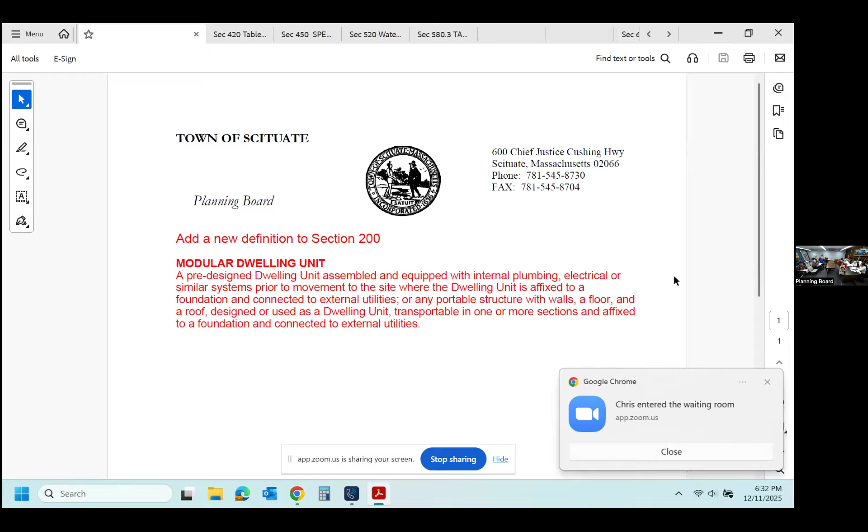It's up on the board, so I think everybody can read it. It's the state definition, and we just thought it would make sense to add it since the AG struck out our stuff about trailers in our bylaw. Any questions from the board, any comments?

Is anybody in the audience? Yes, Mr. Gilpin. Steve York, just for the record, so this is any size building that can be habitable, as long as it would be a single family dwelling. So when they get into zoning for tiny homes and stuff like that, this is going to cover that as well, there's no size limitation in this law.

It's not a tiny home. A tiny home has a separate definition. And the town has to designate it, a modular dwelling unit is a modular dwelling unit. So if a tiny home would satisfy that, it would satisfy it. But tiny homes have to be accepted by the town, and tiny homes are not accepted by the town. They're not designated in the town of Scituate. So there's nothing in this definition that exempts a tiny home, so that's my point, it should say something.

No, because this is right from the state. And the state says that this does not include tiny homes. No, the state does not say that. Okay, anybody else?

I'll vote. Madam Chairman, oh yes, hi Bob. I just want to input on that a little bit. The building code has restrictions on room size, ceiling height, inspections, and various other aspects of the requirements that would be difficult, if not impossible, for a tiny home. At least the typical ones that we're seeing and thinking of in the news, online, whatever, really couldn't be met by those. Thank you.

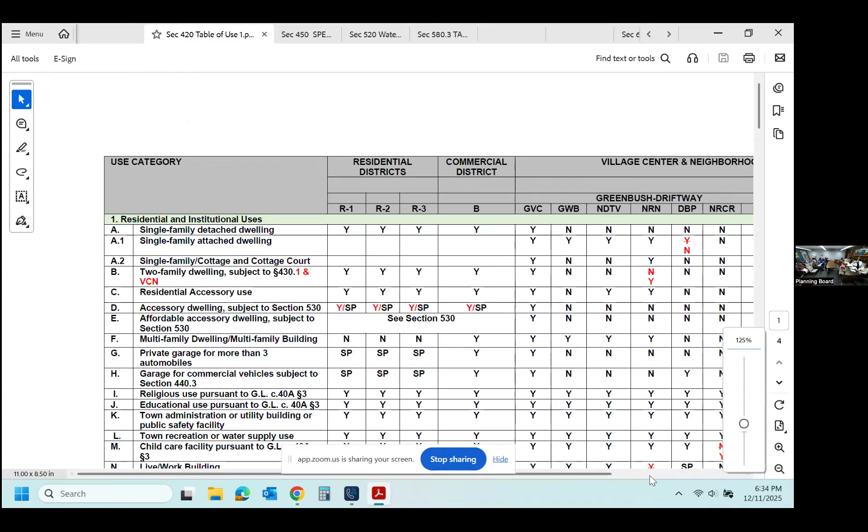So the table of uses: a single family under A1, single family attached dwelling, that's not allowed in the DBP. B, a two-family dwelling subject to 430.1 in the VCN, NRN—it's not allowed. It is allowed. It is allowed.

Accessory dwellings subject to 530 are allowed by right. And we kept the special permit because if you have an ADU over 900 square feet, it's going to require a special permit. But the majority of accessory dwelling units are going to be by right, unless you have a larger home.

Childcare facility, line M, childcare has to be allowed in every district. Not that they would be in every district, but they have to be allowed.

Live work building, number N, not allowed, we're changing it from yes to no in the NRN. Mixed use building—technically you can have a mixed use building in the harbor under the village business overlay district, and that's a special permit. A mixed use building is not allowed in the NRN.

So all of those things, there's all of those different zones in town, so we have 14 of those, it's not a one-size-fits-all situation. Lots of designations for all little areas. The red is the changes. Any comments? That's it? Okay.

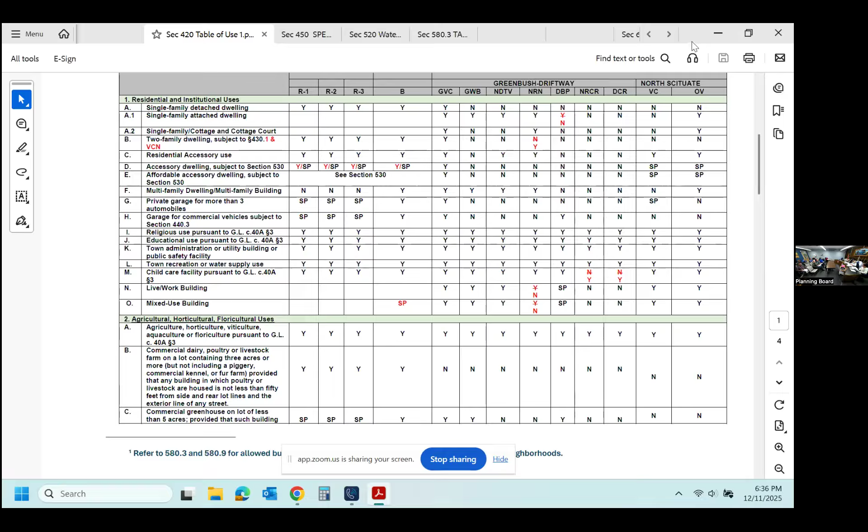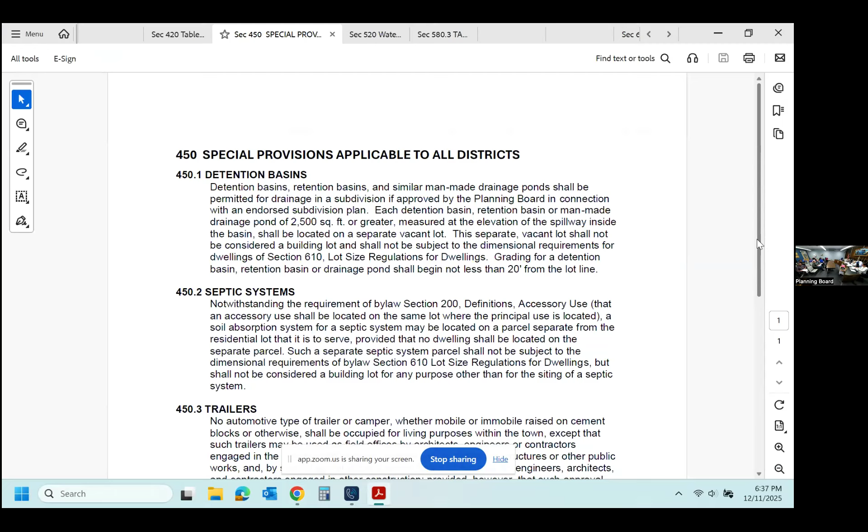The next one is a change under section 450, special provision applicable to all districts. We're adding a 450.5 construction site preparation standard. We're basically reiterating what some departments are already doing, most of us are already doing: no site work until you have all your permits. So we're just putting it in the zoning bylaw.

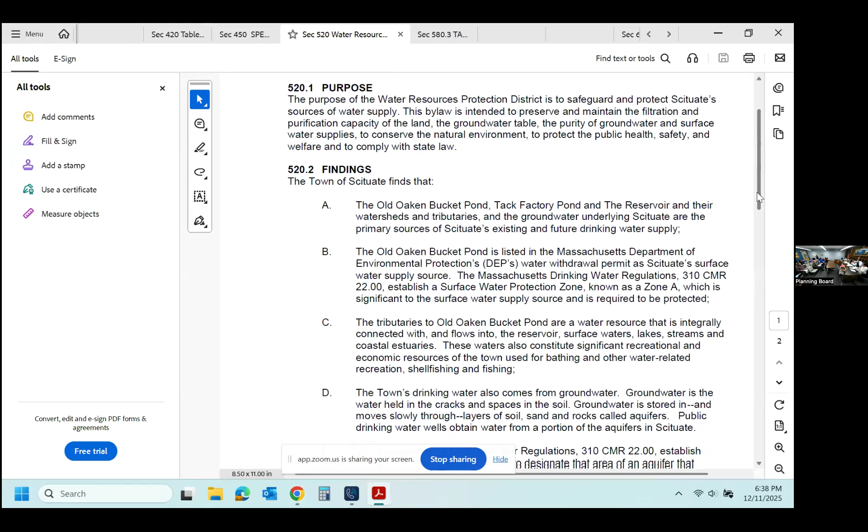Next, Karen? Next one is the Water Resource Protection District. This is a proposed change to change the non-disturbance buffer zone from 150 feet to 400 feet from the high water mark of the surface water sources outlined in 520.2A, and 200 feet horizontally from the edge of all tributaries in the watershed for the sources identified above.

The state regulations for water quality standards list Class A water as anything having a 400-foot boundary, and 200 feet from the tributaries.

So this article is going to be sponsored by the planning board in conjunction with the Water Resource Commission. Does the Water Resource Commission want to say anything on the article? Yeah, Bruce Arbides, 23 Dan Pasture Lane, also chair of the Water Resources Commission.

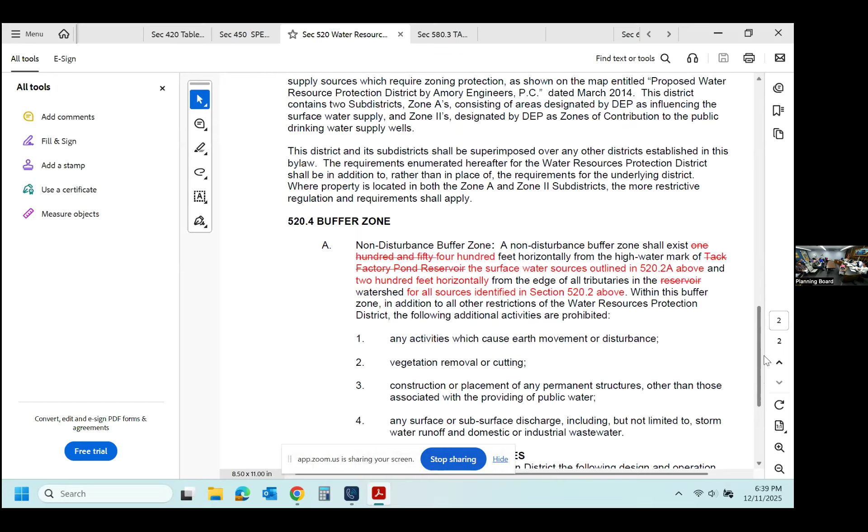I also want to mention that there's a wording change that needs to take place in section 520.2, in the buffer zone. Now the wording change is in 520.4, buffer zone.

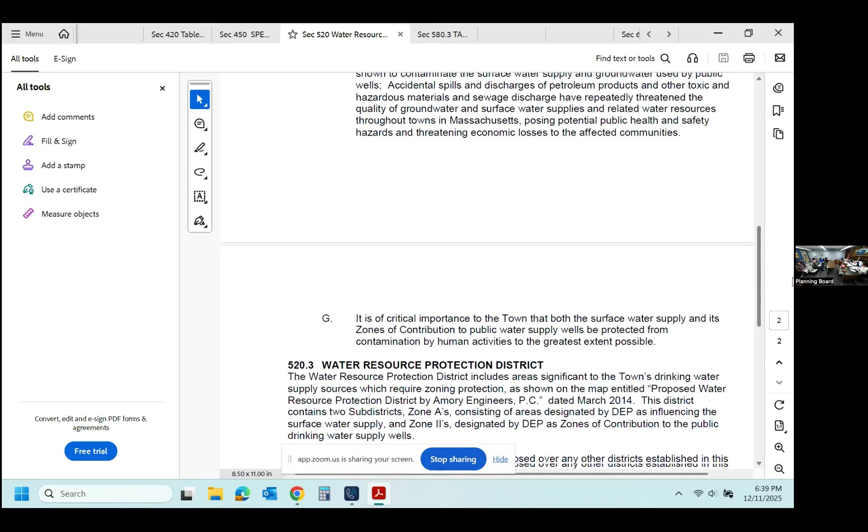The change is we're removing the wording 'Tack Factory Pond,' and adjusting that sentence to refer to the surface water sources outlined in 520.2A above. There's a wording problem with the current bylaw, where the definitional section up front correctly identifies all three components of our reservoir system: Tack Factory Pond, Old Oaken Bucket Pond, and the reservoir. But in the buffer zone, it only talks about Tack Factory Pond. That's incorrect, and we've removed that.

The red is the proposed wording. And you can see the strikeout, which is Tack Factory Pond, yeah.

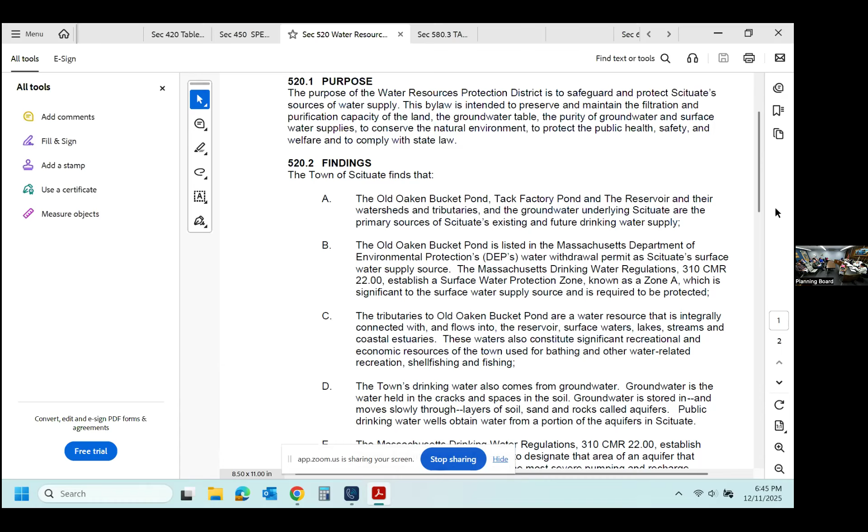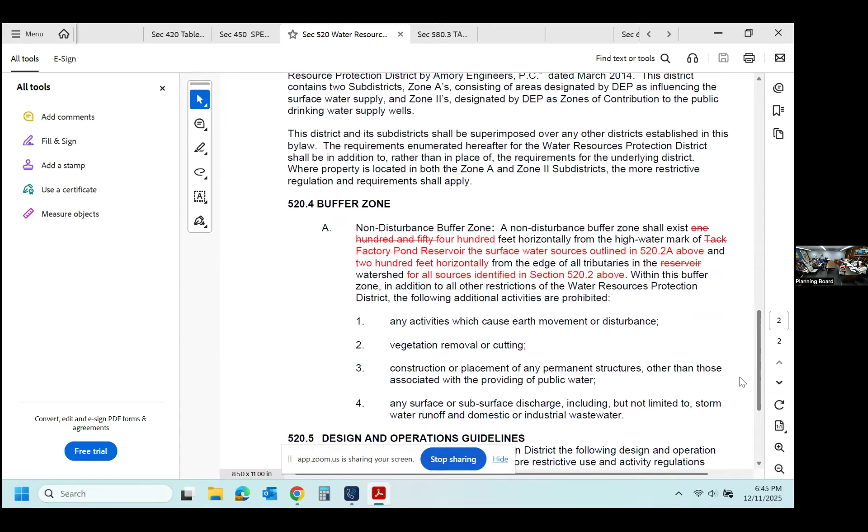I've got a couple more. The language in 520.4A talks about that non-disturbance zone, and it references the areas in 520.2 above. 520.2 above, especially 2A, talks about tributaries. I think we need to be careful with the wording—if the intent is 200 feet from tributaries, that it's not interpreted as 400 feet from tributaries.

Lastly, the bylaw is silent with respect to existing conditions within the non-disturbance buffer. Coming off of the rotary, all of the houses on the left-hand side, all of the houses along Aberdeen Drive, Jenkins Place—there's hundreds of houses impacted by that non-disturbance that already have disturbance into the buffer. I think the bylaw has been flawed in that way. It really doesn't speak to it. Maybe we could make the bylaw better and actually address those conditions. What are those people allowed to do?

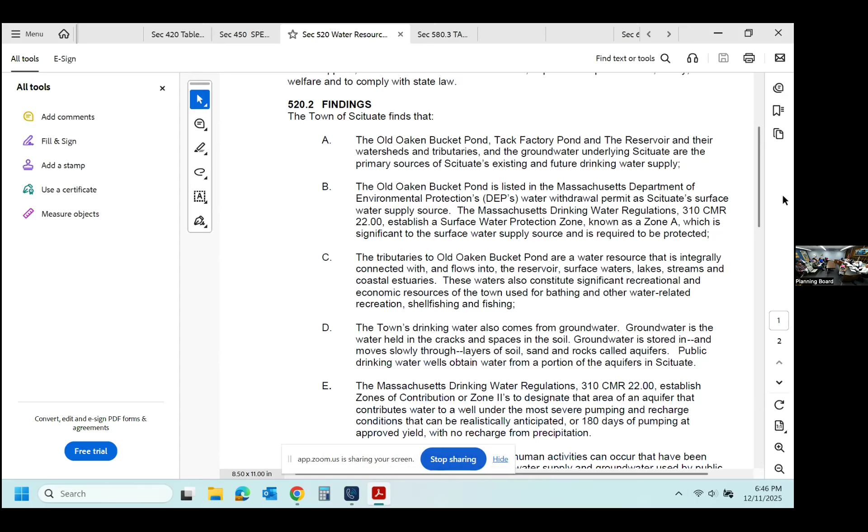It hasn't been developed because the permits as they stand were kind of uneconomic. So I looked at it with a clean slate and had conversations about how we could go about living within the spirit of the bylaw, doing it as a by-right project. It came up today during this informal discussion that this meeting was happening tonight to talk about the new watershed protection. Sometimes bylaws get adopted and things are missed in terms of the implications. There's a lot of real estate along the Driftway that's going to be impacted. This site specifically, if this is adopted, at least based on the way it's drafted right now, would have a direct impact on the viability of that site.

That's an almost completely impervious site right now. It was built probably 60 years ago. It was a medical office building. The proposal that was approved, and my concept for the property, would be to dramatically reduce the impervious surface and work with the existing structure as much as possible. But that would be precluded based on this new overlay.

So I just want folks to understand the language that's currently being proposed is going to dramatically impact some of the redevelopment projects that have been incentivized by the town, because the new overlay bylaws go against the density proposed by the MBTA at the state level for smart growth, commuter-oriented housing. This kind of goes against all of that momentum to create more density within walking distance to the commuter rail.

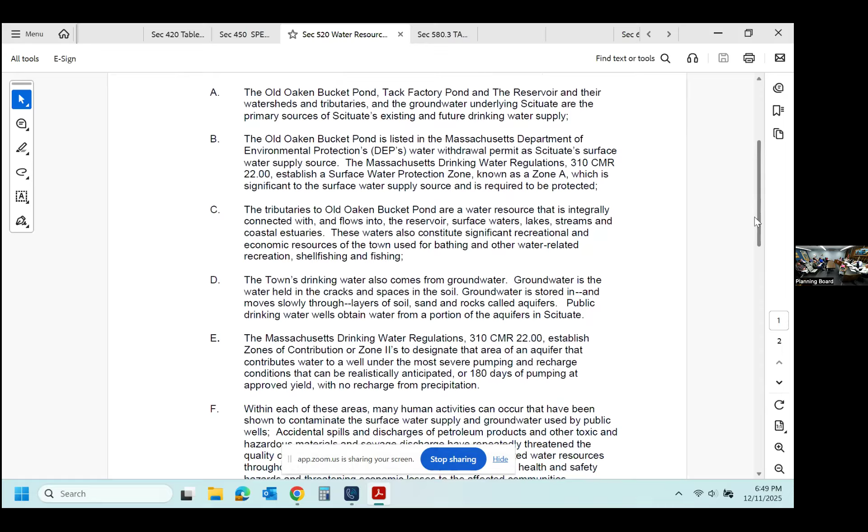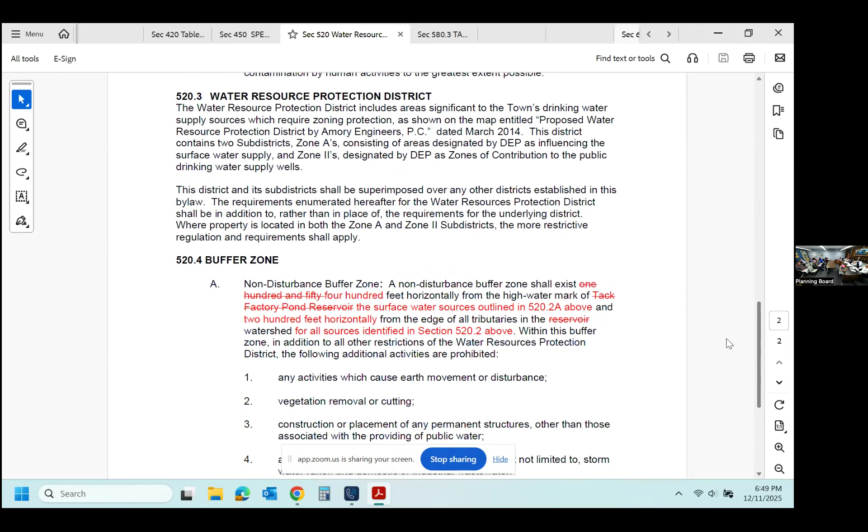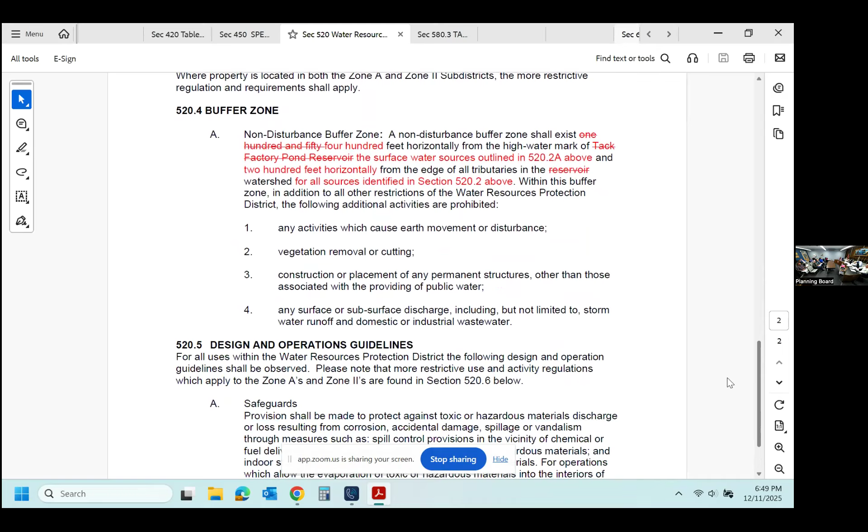From the high water mark of the surface water, which is Tack Factory—but then it says specifically 200 feet from the tributary. It does, but that first sentence says 'from the high water mark of the surface water sources outlined in 520.2A above,' and 520.2A above includes tributaries. That includes tributary, okay. That's right, I get it.

Is that a tributary going behind that property, or doesn't that go out to the ocean? So that's what I'm confused about. Is that classified as a tributary though, if it's leaving?

It's not classified as a tributary. What it is classified as though is the DEP Zone A, because it's a 400-foot horizontal setback around the actual reservoir, around the Old Oaken Bucket Pond. It is down gradient 100% from the water source, but it's included in that Zone A.

Well, we do have a question to the town council about this, we got something on the wall. Yes, sir, Steve Bjorklund again. As you guys change a lot of these bylaws, you always talk about trying to do it in line with what the state's doing. We have to do this because that's what the state does.

I just heard Mr. Moore say that the state does not have a non-disturbance buffer zone. They have a buffer zone that's regulated. I don't think you're gonna see as many arguments if our bylaw actually said you can go to 200 feet, you can go to 400 feet, but instead of prohibiting stuff, regulate it instead. So you could just take out the words non-disturbance and prohibit it, and I think everyone's gonna be all set.

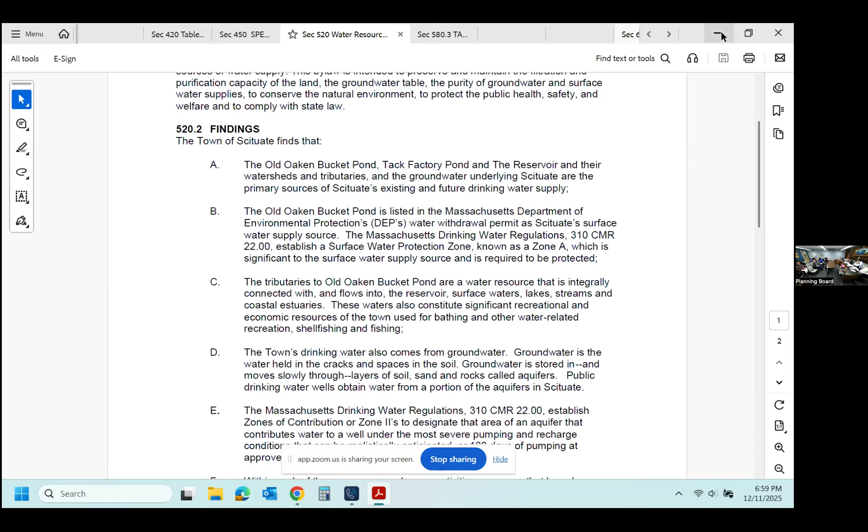Okay, what's next, Karen? The next section is table 1, in section 580, allowed building types in the BCN district. We're changing it in the NDTV district, saying that a cottage court is not allowed in NDTV now, because that's your mandatory mixed use district, and a cottage court is not a mixed use. No, there isn't. Everybody hear that? Yeah, but it was not one, okay?

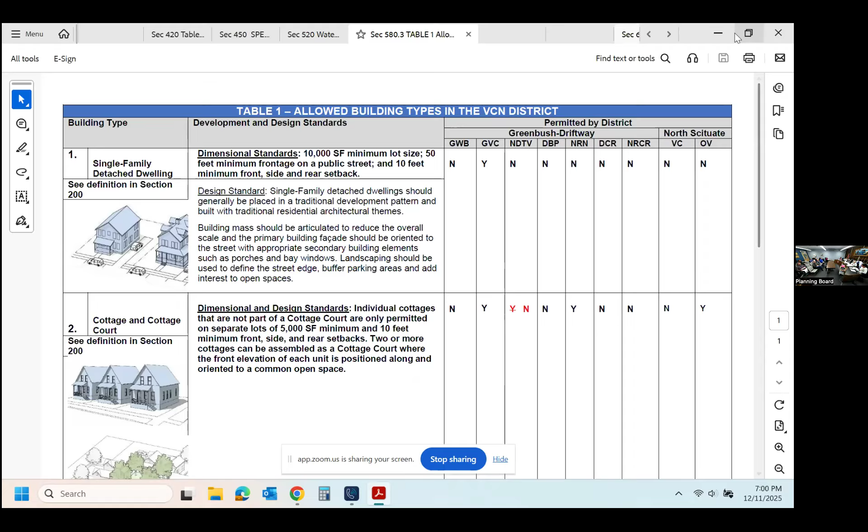All right, the next one is section 610.1, lot area and width requirements. It's been said that the bylaw was a little vague in saying that all required lot area must be contiguous. So all we're doing is just clarifying that all required lot area needs to be contiguous. Just a clarification.

Where's the vague part in this? I didn't think it was vague. Other people said it's vague, so to make sure there's no confusion, we've opted to clarify. It's not a small issue here. It's very easy to say that it does not have to be contiguous, but this is a big change. Don't do it under the guise that this is something simple. It's not vague, it does not say that it has to be contiguous in the existing bylaw.

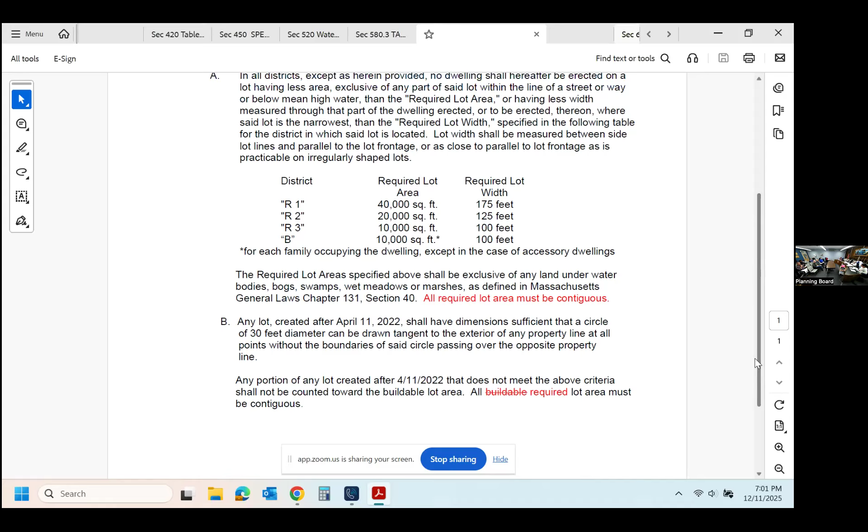It does not - under B, it's under B, it does, yes. Under A, it gives you your lot area. Under B, oh, this is the new change. We did that circle thing. Yeah, we did that circle thing. So it's already in B. It says we're changing buildable to required.

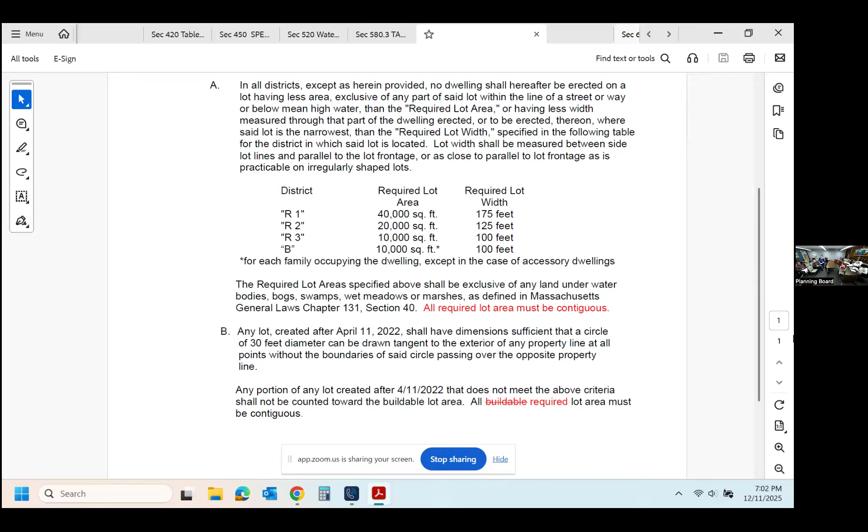Shall not be counted towards the buildable area. That just makes it more confusing. All right, we'll go on this side. I didn't get that figured out yet. And Karen, see, that does help. Okay, next.

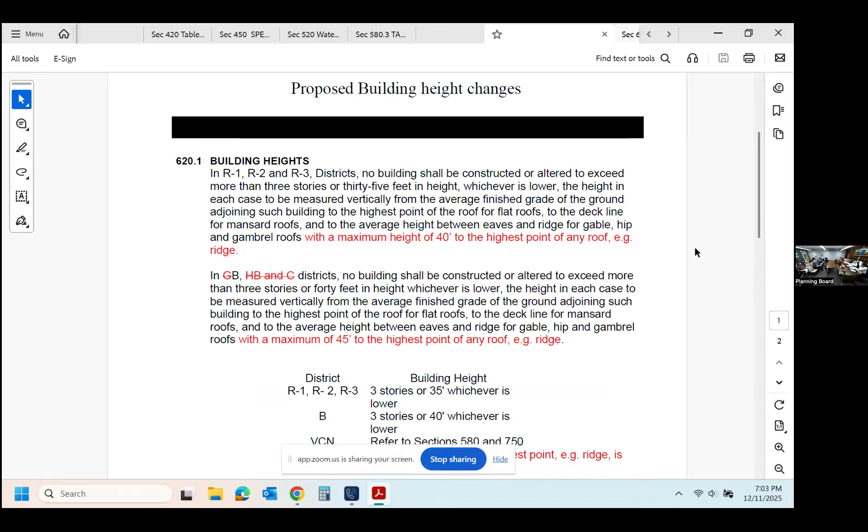Next is clarification on building height under 620.1. It already says in the zoning bylaw that in a residential district, you can go to a maximum height of 40 feet to the highest point. So we're just clarifying that under the first paragraph - it's already in the third paragraph down. We're clarifying that in the business district, you get a maximum of 45 feet to the highest point of any roof or ridge, and the same thing in the VCN.

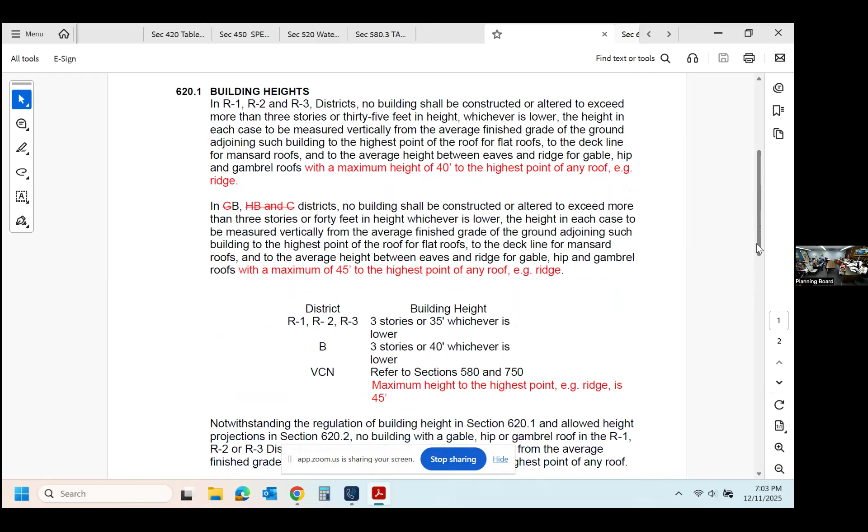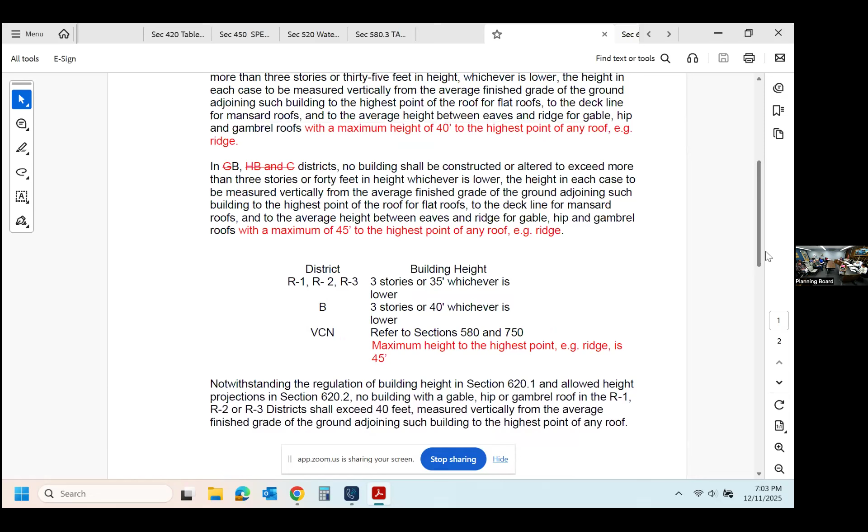If you remember our definition of height, height is measured from the average grade. So the average grade to the maximum height is 40 feet. And now this is saying what the current practice has been - that's to the midpoint in the gable. You obviously have a higher point to the peak of a ridge. That took me a year to understand, but lots of people tell me how that works.

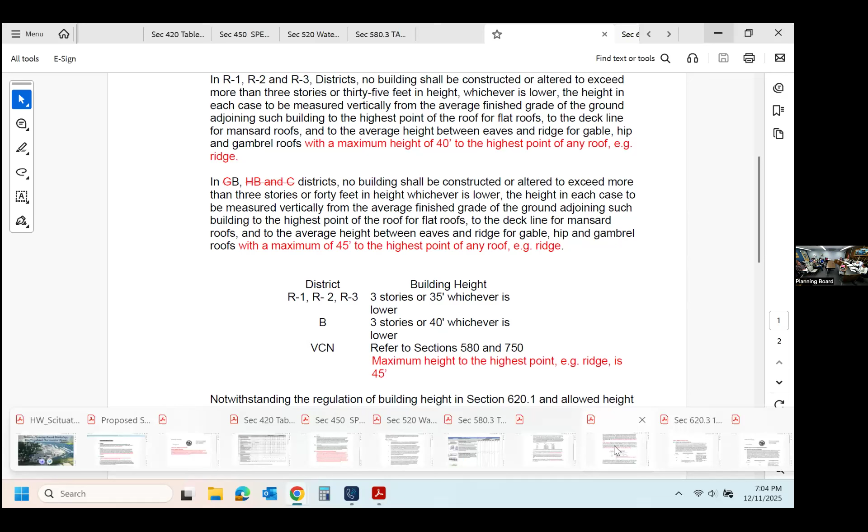The next one is 620.3, setback and yard requirements. We're proposing to change the rear yard depth in the R1 and R2 district to 15 feet for one-story detached accessory buildings, and 30 feet for all other buildings.

This is because of ADUs. ADUs require the least permissible setback, and this came directly out of our adoption of the ADU bylaw. We're trying to minimize impacts to abutting properties. Totally agree with you. Thank you. There you go. Good job.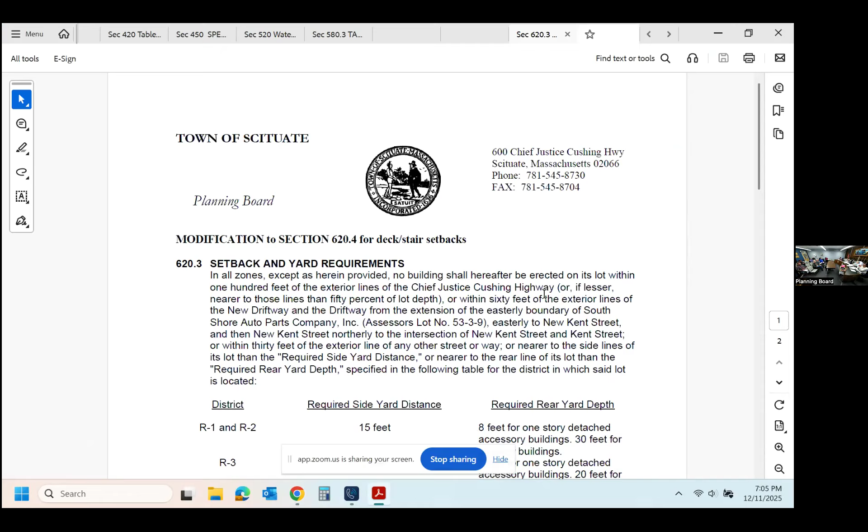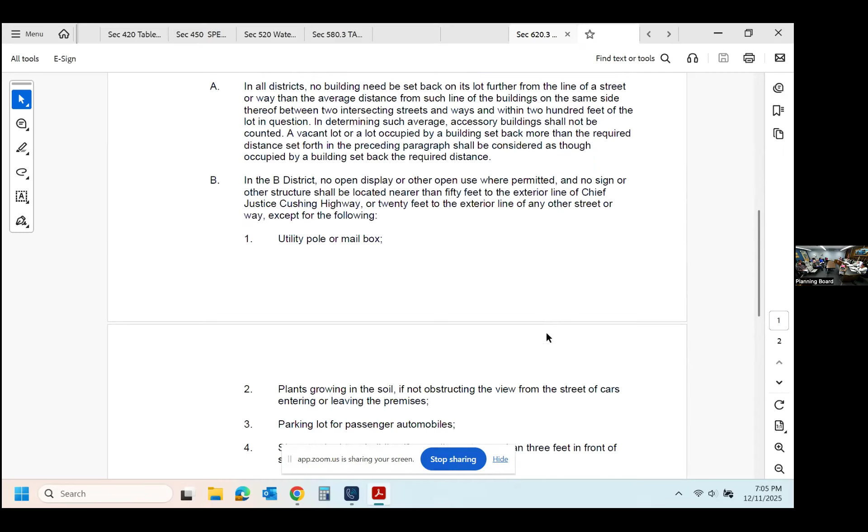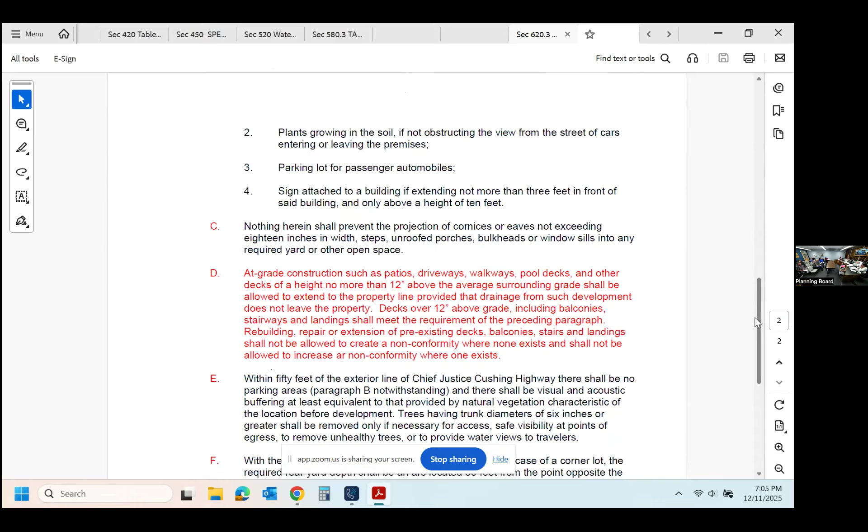All right, the next one is a modification to 620.4. We're adding a new section D - you have to remember the sections. We're basically saying that at-grade construction of patios, anything under 12 inches, can go to the property line, provided that drainage doesn't leave the property. Decks over 12 inches above grade, including balconies, stairways, and landings, shall meet the requirement of the preceding paragraph - meaning they can't project into the setback more than 18 inches. Rebuilding or repair of stairs and landings shall not be allowed to create a new nonconformity where none exists, and should not be allowed to increase the nonconformity.

This also arises from some recent building and complaints that we've received. Mr. Green - the comment I have on this, I did have a chance to talk to Bob today about this for a little bit. There are a lot of people that have first floor decks, but generally if you step out of your family room, you're gonna be a couple feet out of the ground because your foundation's gonna be out of the ground, obviously.

And I would make a suggestion that instead of it being 12 inches, it'd be 36 inches. I understand what you're trying to do - you don't see second floor decks looming over people's houses. But right now, the bylaw does allow for decks to go up to the property line, and I think it's reasonable that you can put a beam underneath it, 2x10s or 2x12s and decking on top. So they'd be maybe 2.5 feet out of the ground for a first floor deck, and I think it would be reasonable to change the 12 to 36. Mr. Vogel? Yeah, I think that's an interesting point and probably valid. It would also allow for things like a front stoop and 3 or 4 steps going down to grade - typical house, perhaps the first floor is, as Steve said, a couple feet above the typical grade.

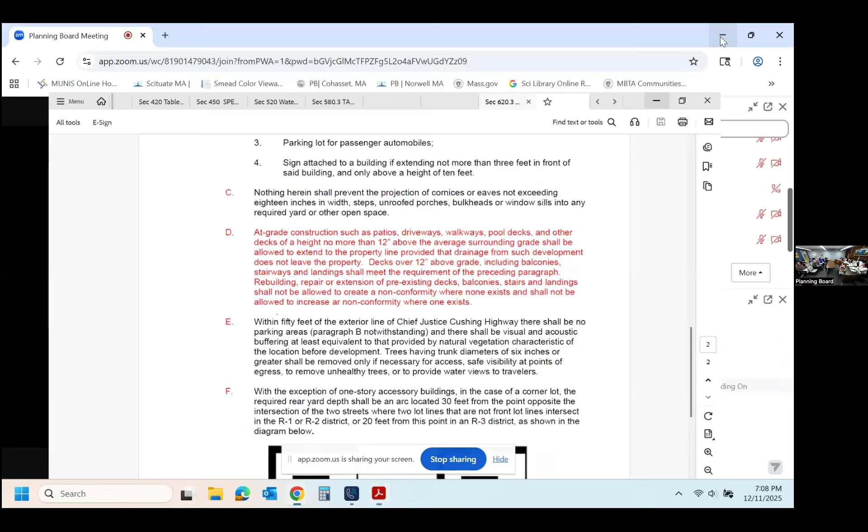So are we changing it in both places? Yes. Decks over 36 inches above grade, including balcony stairway, shall meet the requirements of only 18 inches into the setback.

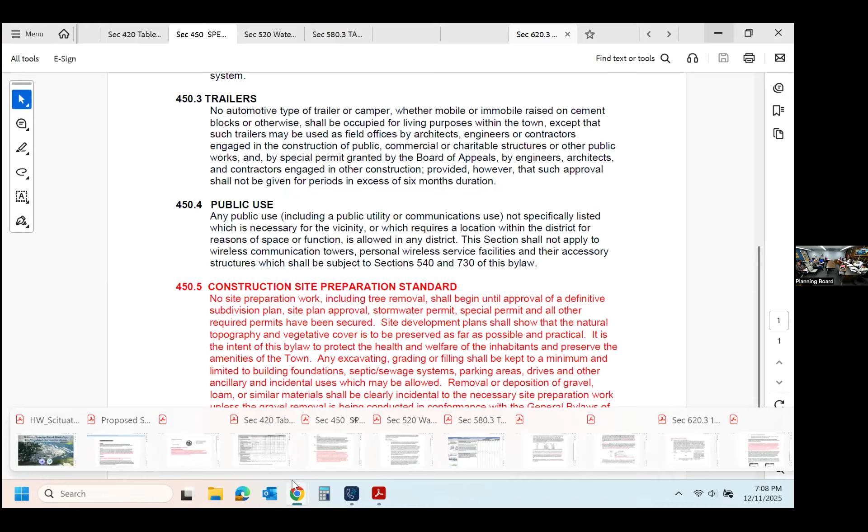So that's the proposed zoning changes that will be legally advertised and put on for the public hearing on January 8th, and your spring town meeting.

So this is not the last time we discuss this. We will do some more research on the Water Resource Protection District. How does everybody feel about that? Good. Yes, I can move on.

Yes. All right, so the next one is we're revising the stormwater general bylaw. Again, you revised the stormwater regulations in October. The approach we took to revising the bylaw is we're trying to comply with the MS4 requirements, and we're trying to do some general housekeeping. Right now, our bylaw has stuff that really belongs in regulation. We just fixed our regulations, so that's why there are some deletions in the bylaw to take out stuff that's in the regulations.

A bylaw has to go to town meeting. Regulations can be changed with a public hearing. We also added some stuff in the bylaw that was brought up in the public hearing last time on stormwater regulations. We got in some 80% thresholds and some lots, undisturbed lots.

So if you go to the next slide. Or the next page. There, perfect, thank you. Yeah, so this is what I'll go over tonight.

The first two or three topics we've already talked about: the MS4 permit in general and stormwater, the required bylaws under the MS4 permit, just a bit of a recap of where we were a few months ago in terms of Scituate's existing stormwater regulations at the time and the stormwater bylaw, and then go through the process for updating the bylaw, like Karen was alluding to, leading up to a January 8th planned hearing. And then the idea being to bring an updated stormwater bylaw to town meeting in the spring.

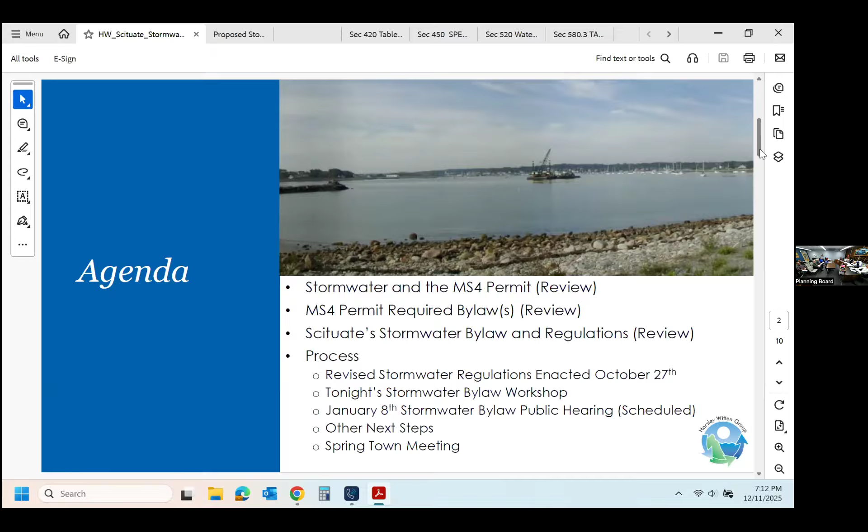Because we're doing this because we are not in compliance right now, right? Correct, yes. So the regulations were updated in October. I believe EPA confirmed that they were fine. Okay. Right, but in terms of the regulatory structure, without a bylaw, the regulations don't really exist. The bylaw needs to catch up to the regs, for lack of a better term. So tonight's opportunity is for discussion and some initial feedback leading up to that January anticipated hearing.

Just a quick stormwater 101 here. Again, we're talking about stormwater, which is different from wastewater. Stormwater is water that flows over surfaces like roads and parking lots and gets into the nearest water body, generally untreated, unlike wastewater that's usually treated by your septic system or a wastewater treatment plant. In Massachusetts, we have the MS4 permit, which is Municipal Separate Storm Sewer System Permit, quite a mouthful there.

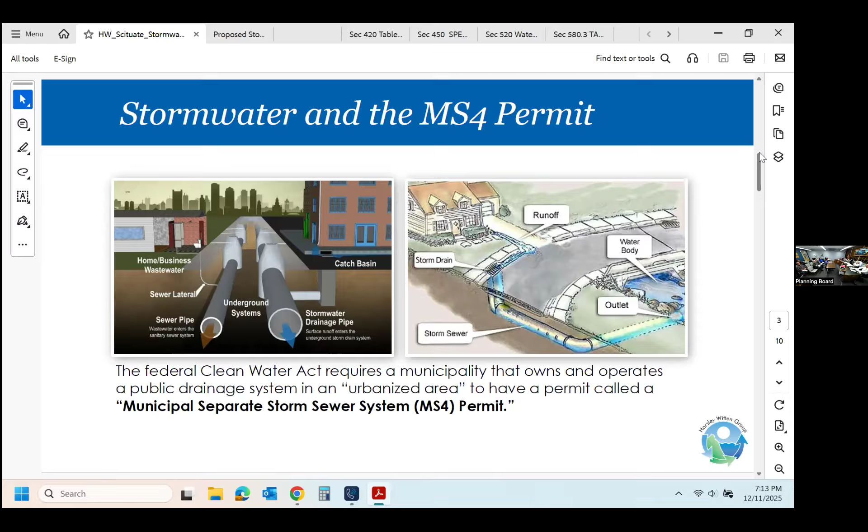That is the permit that any municipality like Scituate has in order to operate and own a stormwater system that catches the stormwater and releases it to water bodies.

The permit has 6 minimum control measures. Those are often referred to as MCMs. You can just kind of think of them as the categories of requirements in the permit. They range from things like public involvement all the way up to the municipality's own housekeeping activities that it must do to keep the stormwater system in a state of good repair.

The bylaw is under MCMs 4 and 5, which I've highlighted on the next slide. So that's the categories we're talking about when we talk about the stormwater bylaw. And there are requirements for both construction site and post-construction stormwater management, with the idea being that those are sites that contribute or have the potential to contribute to stormwater pollution, and so they need to be regulated by a bylaw at the municipal level.

I know we've talked in more detail at previous meetings about what the requirements are, so I'll go through this more quickly, but if folks have questions, I can come back to it.

Generally, the permit requires municipalities to have a bylaw that regulates a construction site or a development site disturbing 1 acre or more. That's the threshold set in the permit, and that's where Scituate's existing bylaw and regs were lacking a bit of that overarching threshold.

There's also construction site stormwater requirements for managing construction waste, controlling erosion, and other things on construction sites, and then requirements for post-construction for things like stormwater performance standards, operations and maintenance plans, and other requirements for sites after construction.

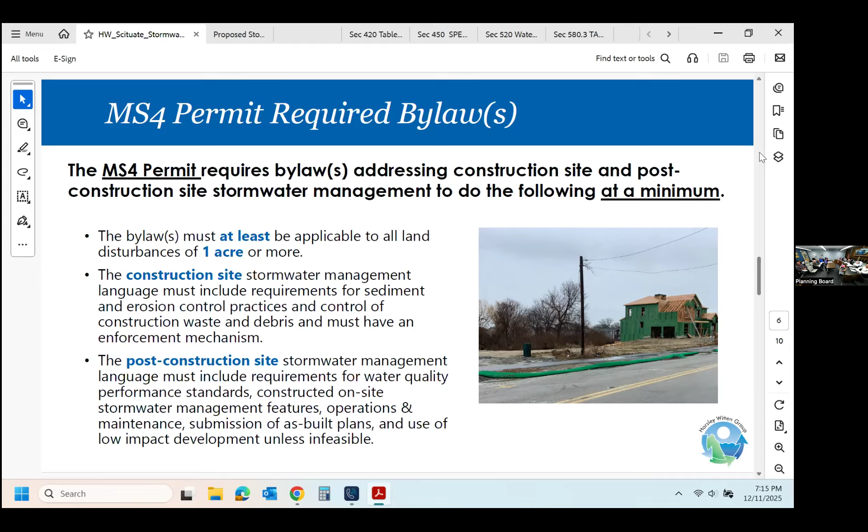And hopefully not to confuse things more, but typically municipalities like Scituate do have both a bylaw and regulations. Like Karen was alluding to, the bylaw sets the general framework, and then the regulations typically provide the details that accompany that regulatory framework with more of the nitty-gritty aspects of processes and things like that.

This is where we were as of a few months ago, and now with the updated regulations, things have changed a little bit, but the bylaw needs to catch up to that, and I'll get to that on the next slide. First, though, just a refresher: EPA reached out to Scituate and noted that the bylaw and reg were not in compliance, and needed to be updated by the end of this year.

The idea at the time was that the regulations could be updated more quickly to bring Scituate into compliance as fast as possible, and then the bylaw would be able to follow behind that.

On the screen here is a summary of the things that Scituate's bylaw was generally missing. It addressed some aspects, but it didn't have all of the water quality performance standards. It didn't have that overarching 1 acre threshold that I mentioned, and it also didn't have some of the requirements for impaired water bodies that are specific to a given municipality.

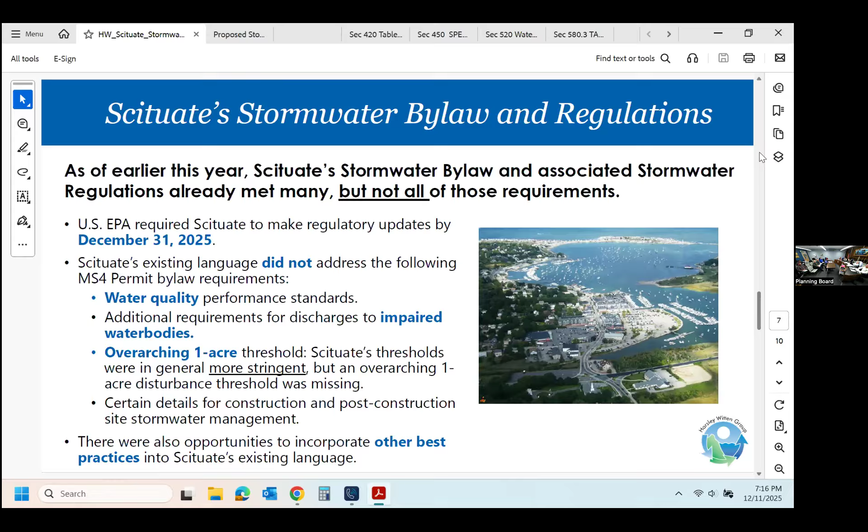As Karen was also alluding to, anytime you open up a set of regulations or a bylaw, it's an opportunity to clean up some issues or add additional issues that the town would like to address. So that was done with the regulations, and there are some other opportunities here in the bylaw to match those up and address some other concerns that the town has raised.

So as I've already been alluding to in the process, the regulations have already been updated. We're now working to update the bylaw. We have a draft bylaw for review, with the idea being we have public input tonight, public hearing in January, and then bring a version of the bylaw to town meeting to clean up the process or complete the process, at least this phase.

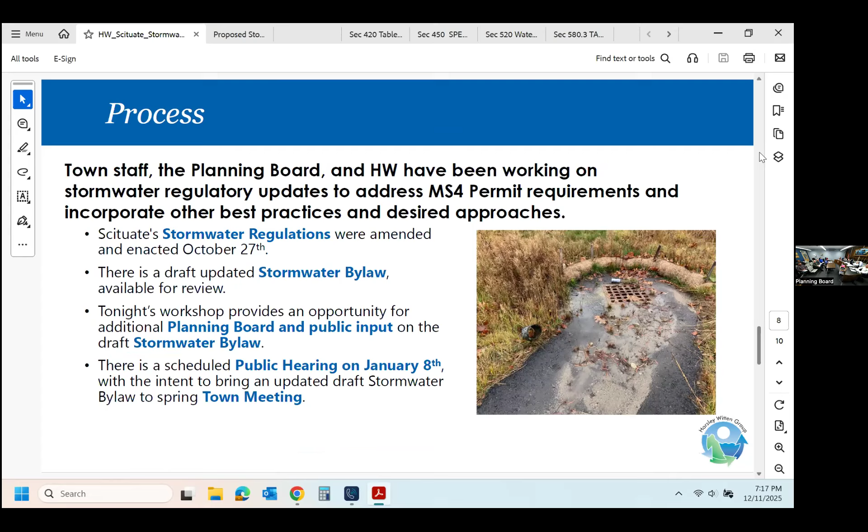So at this point, you might be wondering, what are those changes? On this slide, I've tried to summarize with a couple bullets the types of edits we've made. Of course, the details are in the edits themselves, but just for reference, there is non-substantive cleanup that we've done just to clean up typos and other confusing language or places where we need to match things up with the stormwater regulations.

There's also been places where there was duplication with the stormwater regs, where it's better to let the regulations speak for themselves and have the bylaw be a little cleaner for flexibility. One example is we use the term stormwater authority more generally in the bylaw, then let the regulations define how the stormwater authority works, which allows flexibility in defining the process, or in the future if you wanted to change that, it can be changed in the regs. There's other examples like that, but that's probably the cleanest one.

We've also made updates to amend language to match the stormwater regulations. So despite what I just said, there are places where you do want the same language in both documents. Topics like definitions or applicability thresholds you want to match up between the two documents.

Getting into more complex or detailed changes, there's an addition of further review, coordination, and documentation for projects in the Water Resource Protection District, which was a request from the town and an issue that came up in other conversations. There's also an additional 80% threshold for projects that don't quite meet one of the existing thresholds but are at 80% of one. There would be an additional review and documentation process to check those projects and ensure they're not in fact meeting or exceeding an applicable threshold.

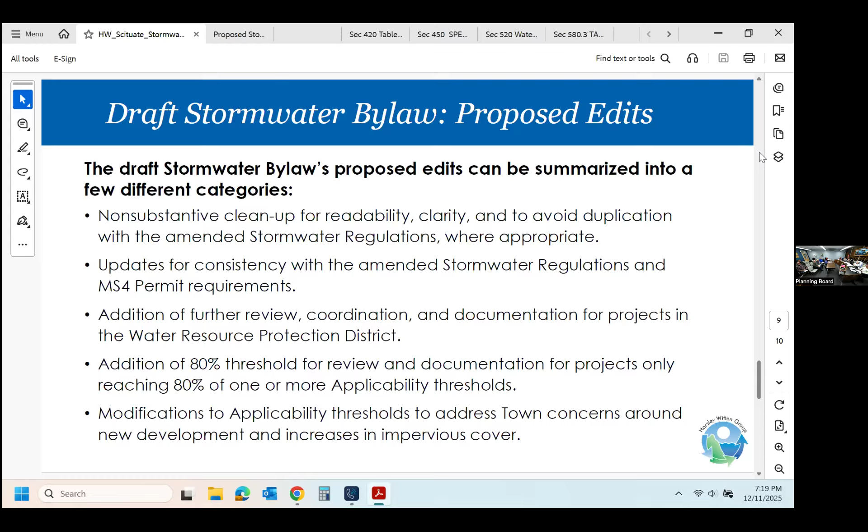And then last but not least, there are additional modifications for applicability, including bringing new developments on previously undisturbed sites into the review process under the stormwater bylaw. That's an additional change that would be in the bylaw beyond what currently exists.

So that's a lot to go through. I'm happy to go back and talk about more specifics or answer any regulatory questions, or questions from the public or from you all about where we're at or what's in there.

If you want, we can go page by page through the bylaw so that everybody gets a chance to understand what we're doing and ask questions if they have them on what's proposed. Take it away.

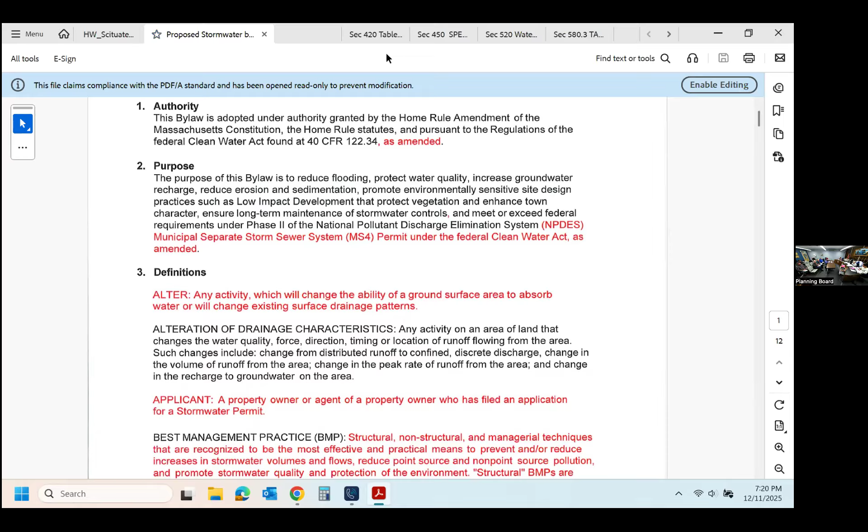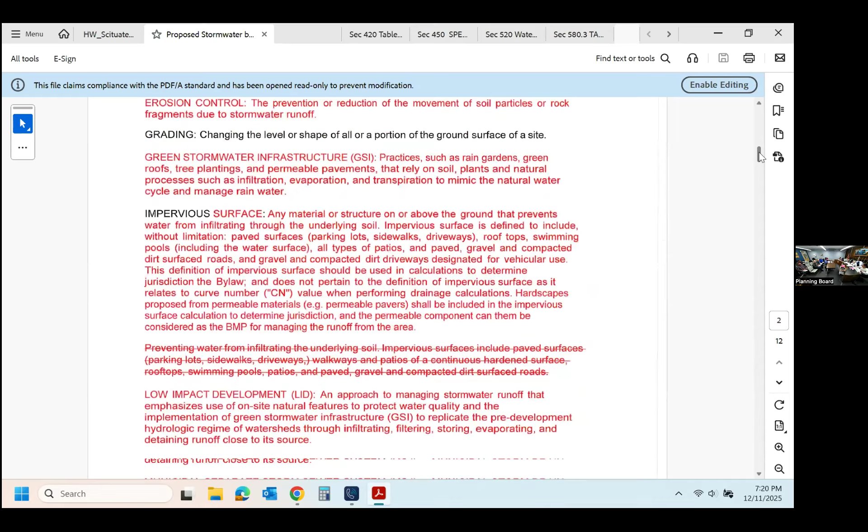All right, so on the first page, some of the definitions we didn't have in the bylaw, some of them we're making the same as the regulations. That's basically all the definitions, so that takes us through page 3.5. We tried to make sure the definitions all match each other and meet the required ones for MS4. We didn't have erosion control plan and stuff like that, so we had to spell that out to meet our MS4 requirements.

Section 4 is applicability. Hang on, okay, I guess that's the last one.

Hey, I'm Nick Tomasio, Chairman of the Bylaw Review Committee. The whole committee's here, so we're trying to wrap this all up together.

My first comment is on the definition of impervious surface. This is a grammatical one, it just doesn't read well. Down near the middle where it says this definition of impervious surface is to be used in calculations to determine jurisdiction, should there be something else in there referencing the bylaw? Yes, okay, that was it on that one.

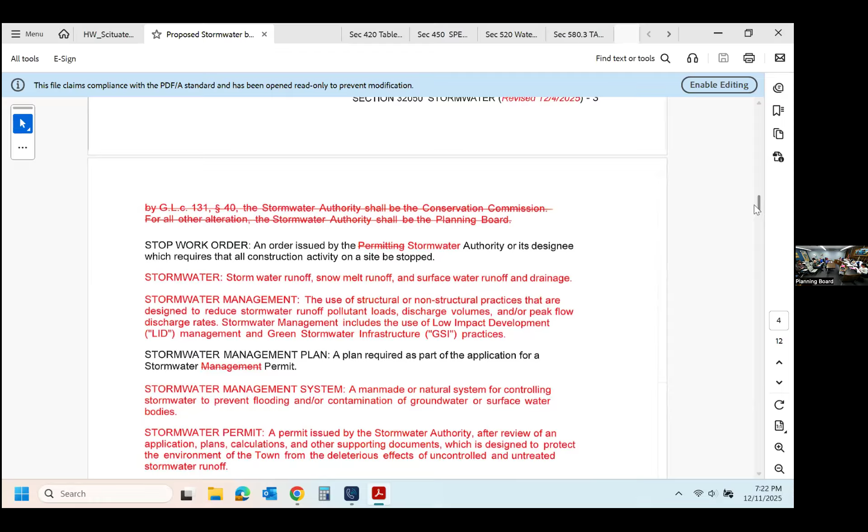And then if we go to the next page, it's actually on page 4. What we've done is deleted the definition as a change but then added it back in as a change. Well, I don't think that's necessary to show, it could add confusion. Stormwater was the definition that was already in there, but going down, it wasn't in alphabetical order, so we put it in alphabetical order. That's why it's crossed out. We have to show all the changes to be totally transparent. I'm okay with that, thank you.

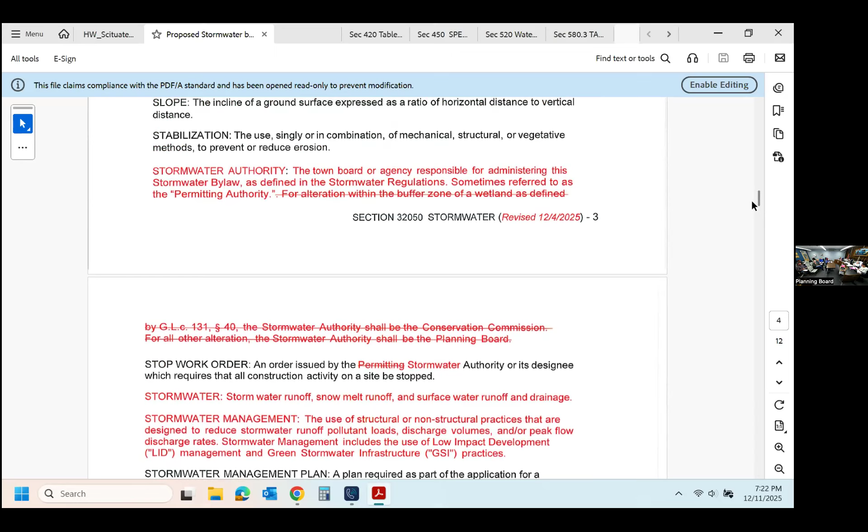And comments, Mr. Mills? The definition of impervious surface in this bylaw is different than the definition of impervious surface in the zoning bylaw. I wasn't sure if you should coordinate the two of those.

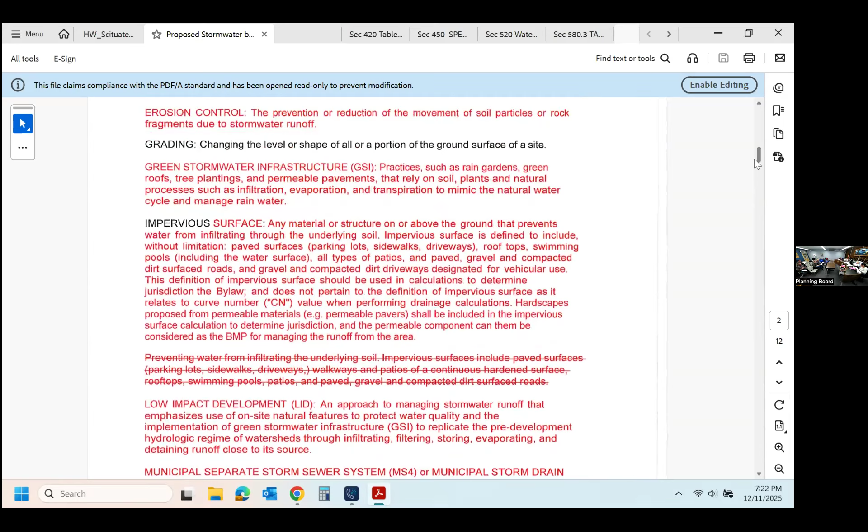That was one item. The second item is the resource area definition. It takes any area protected under the Wetlands Protection Act. I think resource area is meant to protect the wetland itself, for example, but under the Wetlands Protection Act you also have a 100-foot buffer zone to a wetland that is a protected area, but it's not really a resource. So I wasn't sure if the definition of resource should be changed to specifically identify wetland resources and not their buffer zones.

Is that not covered by referring to the particular acts? So under the Wetland Protection Act, you have the actual wetland, but also the land protected is the area within 100 feet of said wetland. The wetland is what's considered the resource, not the buffer zone, which is the land.

Well, it says any protected area under the Wetlands Protection Act, which defined includes as a resource area, so it seems like it includes it. It says any area protected under, including without limitation, the Massachusetts Wetlands Protection Act, Rivers Act, or Town of Scituate Wetlands Protection Bylaw. So it would seem like it covers the buffer zones, the river buffer zone and all that. I guess I just want to know, it'd be good to clear that out.

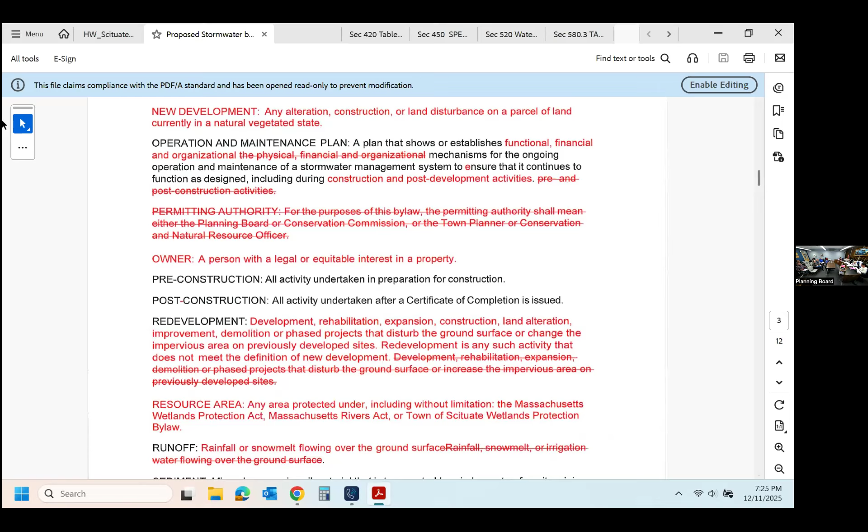Yeah, go ahead. And that's strange one when you're talking about the definition of new development and redevelopment. In the definition of redevelopment, at the end it says redevelopment is any such activity that does not meet the definition of new development. And in new development, it says any alteration, construction, or any disturbance of a parcel of land in a natural vegetative state. Should it say any activity that doesn't become a redevelopment one? Or is there any reason to have that sentence in one definition and not the other?

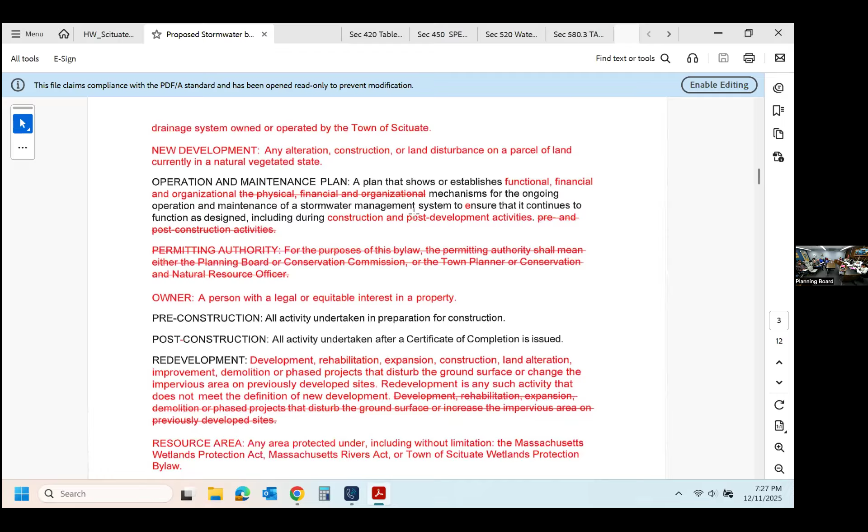All right, section 4, applicability. We've changed the applicability a little bit here, based on comments from Mr. Morse. So any new development, we've added, has to have a stormwater permit. We don't care if it meets the threshold. If it doesn't meet the threshold, it still requires a stormwater permit.

We have a lot of sites. We have some sites in Scituate that have recently just been disturbed and they didn't require stormwater permits, and they were disturbed, and they're in sensitive areas. They're few and far between, sites that are totally treed. So we put that in there. We clarified the language in number 2 and we cleaned up some other language in applicability.

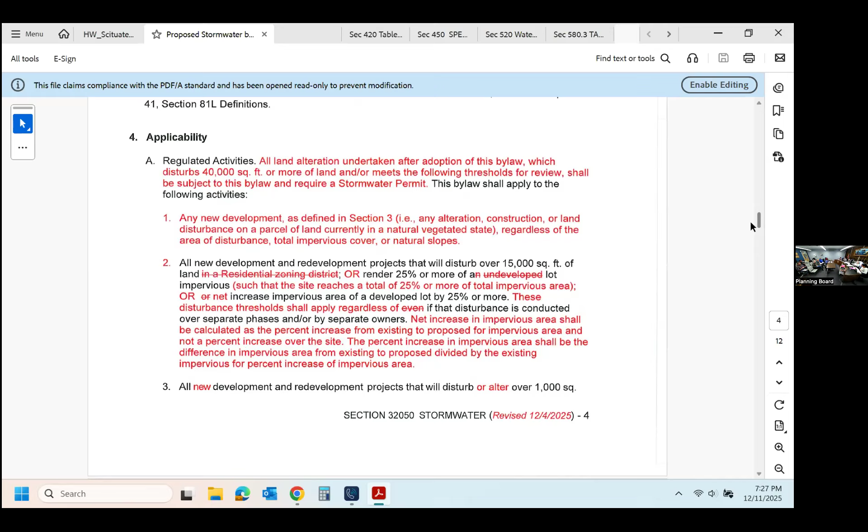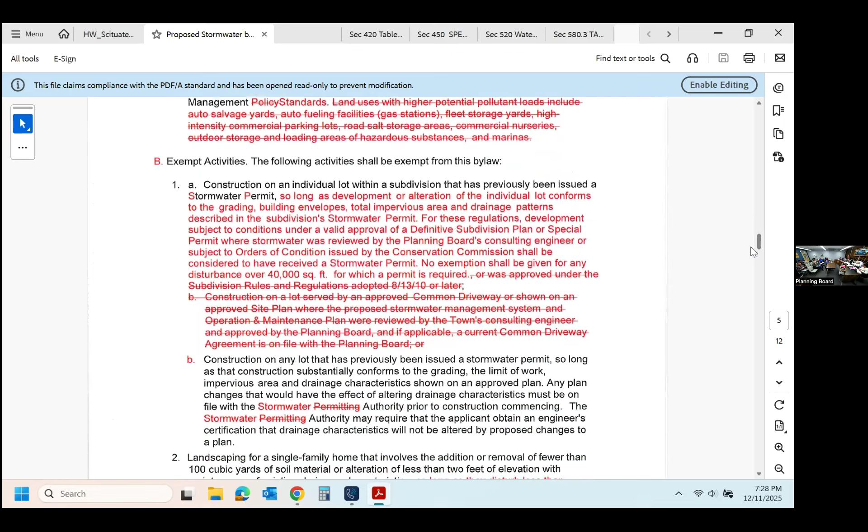That's under A. We cleaned up a little bit of stuff in exempt activities as well. We added a C, projects meeting 80% thresholds. We have a lot of projects that apply for building permits that come in at 23.9% impervious and 14,990 square feet of disturbance. All this is saying, if you're at 80%, give us a staking plan.

We're going to hold you to that in the end. And I will tell you, we know of instances where it's been exceeded and people got away with it. So we just want an itemized breakdown that you file with your building permit, so that the building department knows, and we all know it didn't need a stormwater permit, but this is really what you're limited to.

And then projects in the Water Resource Protection District, this has been a sensitive area in the past where some projects, the building commissioner felt that maybe they need a little bit more review to make sure they're meeting the Water Resource Protection District requirements, and they may need some stormwater measures too. So how this stuff comes about is that we get plans and then things fall through. For every project, we learn something, and that is reflected usually in zoning bylaws.

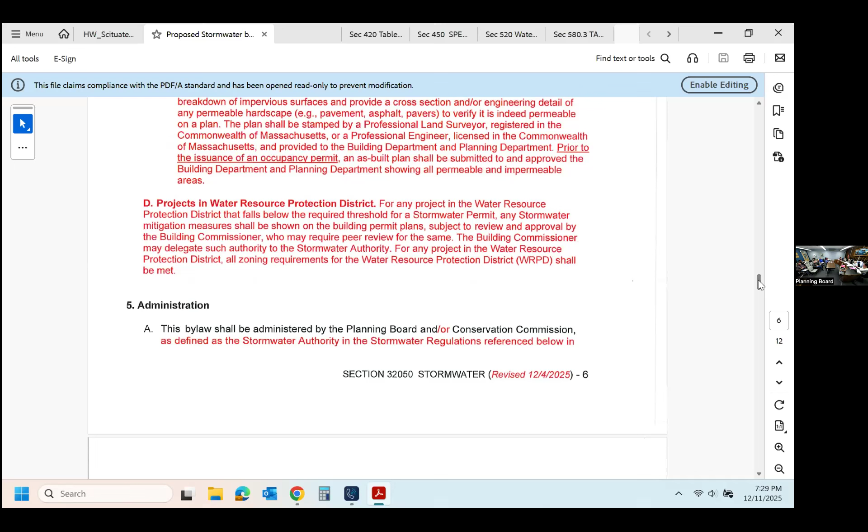Section A1, just a minor comment about, is it necessary to repeat the definition we defined in section 3? We do find it usually clears up a lot of problems. In this particular case as well, because new development can have a colloquial meaning versus as defined in this bylaw, it's an extra check to confirm people are reading new development as it applies to this, not in the colloquial sense. Should it just be capitalized? It could be, to indicate that it's a defined term. That's kind of typically us.

My next comment would be on A2, A3, and A5. I can start by looking at A2. It says all new development and redevelopment. We defined in A that if it's greater than 40,000 square feet or more, it shall be subject to this bylaw. So why would we put some things under there that are less than 40,000 for new development? Well, the bylaw subjects you at 15,000 square feet. We had to put the 40,000 square foot in to at least regulate less, but the EPA wanted to see that we have the 40,000 square feet in there. I got it, okay, and that addresses those three comments. Thank you.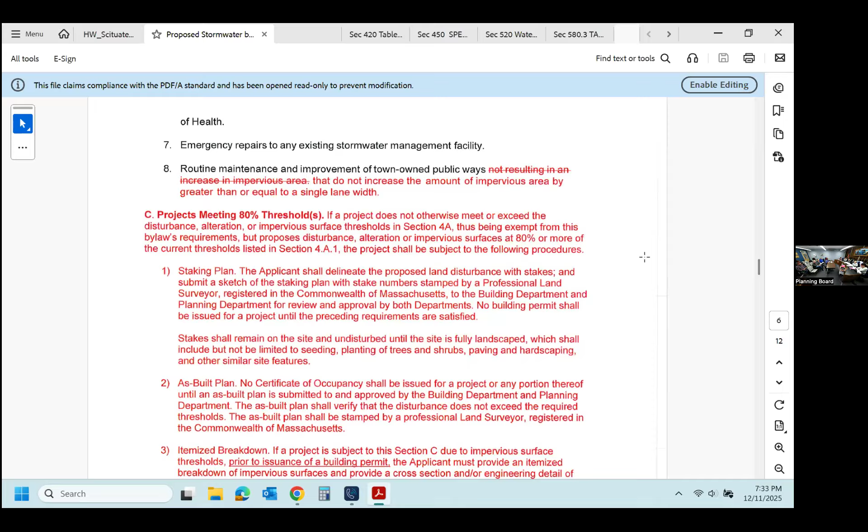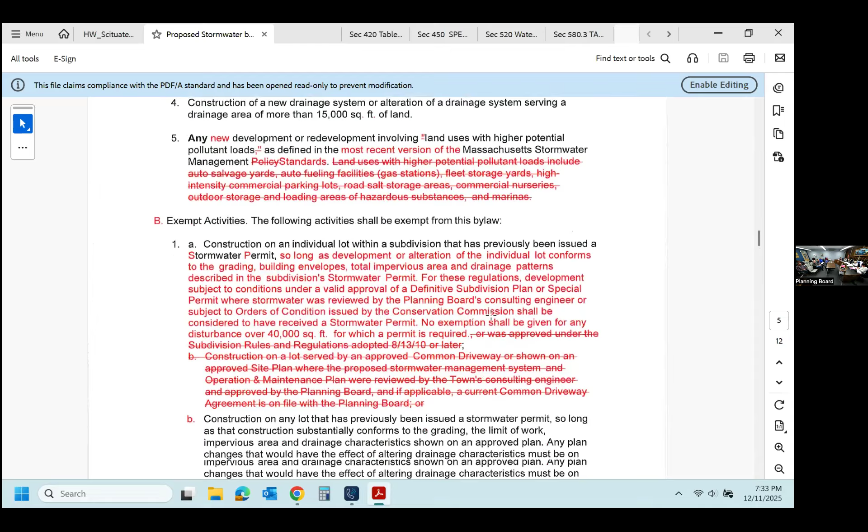Or is there any more comments on that, section 5, administration? We just cleaned up pretty much permitting authority and changed it to stormwater authority. Number 6, we changed 'shall' to 'may'. So that's pretty much housekeeping stuff.

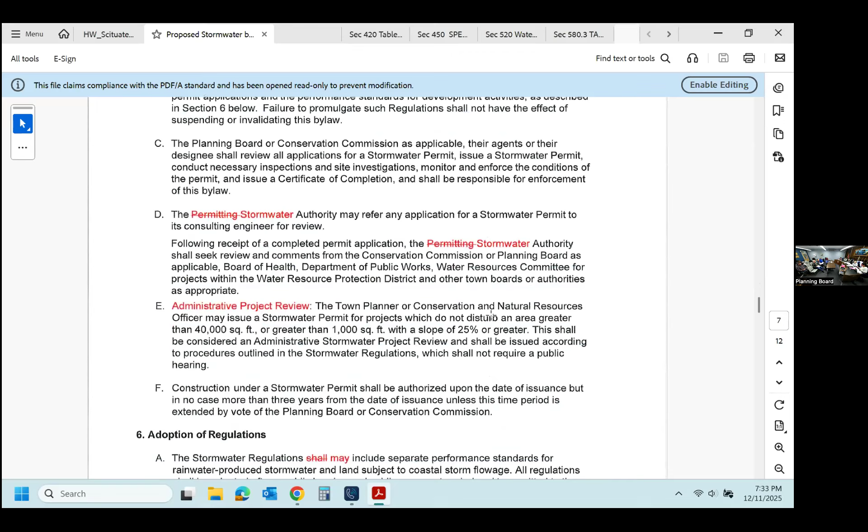Section 7, submittal requirements. We took out a bunch of this because it's in the regulations. So if we want the bylaw to be the framework and the regulations the specifics, we took it out of here because it's in the regulations.

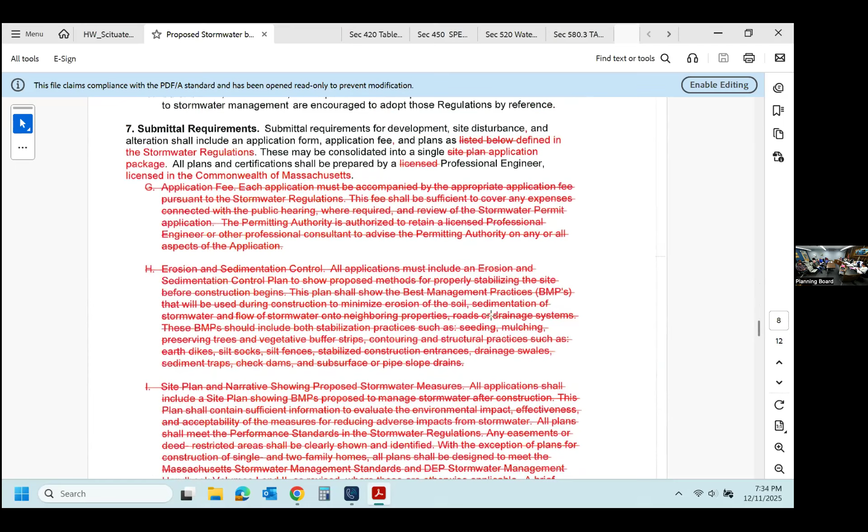And one other on submittal requirements, maybe it's the copy of the bylaw that was used, but my latest copy has G, H, I, and J as A, B, C, and D. I'm just carrying forward. Well, they're all going to be stricken anyways. Okay, but we wanted to show the change, that's all. Change to section A, not G. Oh, I see, it started with G instead of A. No, when somebody goes to Section 7, the alphabet should have been A instead of G. Okay, just a typical word thing.

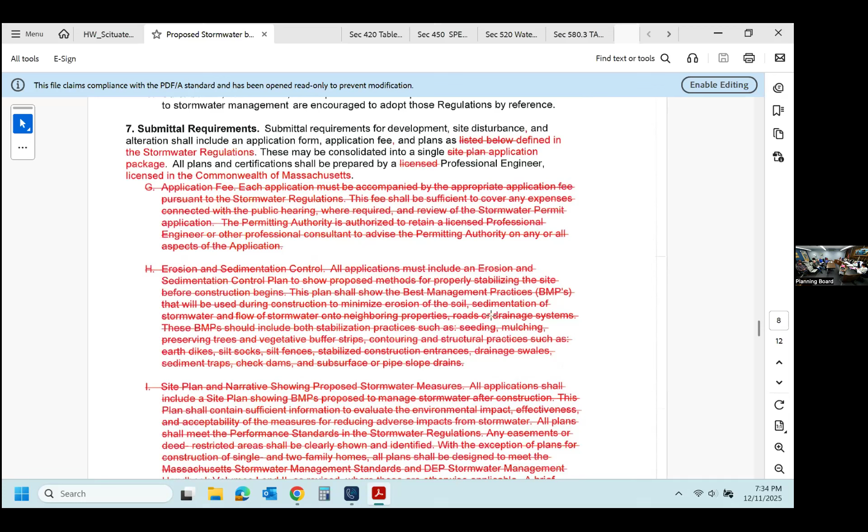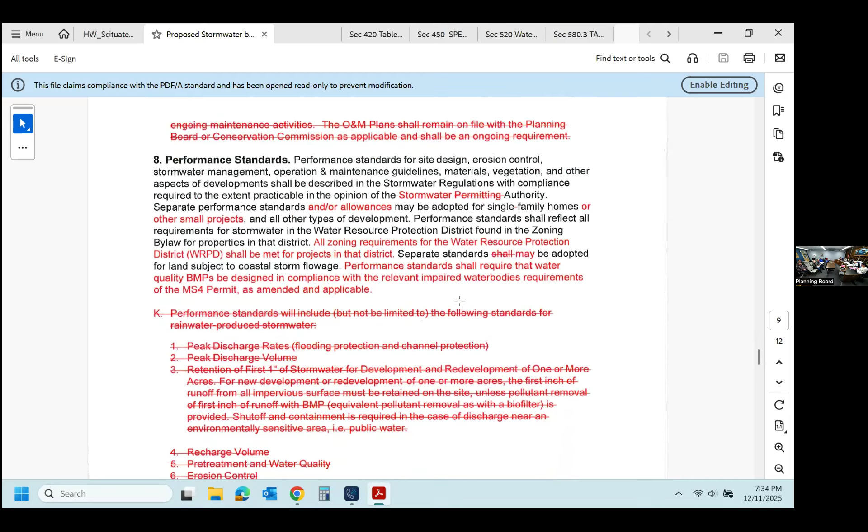Performance standards, again cleaning up the language there and taking out the stuff—the performance standards are in the regulations now, so it doesn't need to be in the bylaw. And cleaning up, changing permitting to stormwater authority.

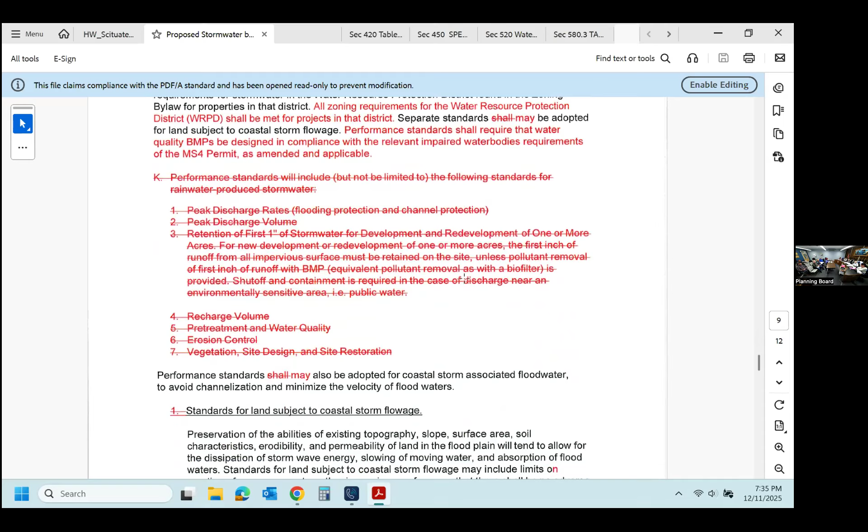Section 9, review process. We clarified a little bit more about the pre-construction meeting, which is in the regulations as well. We talked about public hearing, and cleaned up a little bit about stormwater authority.

Section 10, we cleaned up most of that's permitting authority. And surety, we cleaned up that language, we have some of that also in the regulations. And we put in stuff about a stop work order, which is in the regulations too, under enforcement, because the stormwater authority is allowed to issue stop work orders on projects and issue fines under the bylaw.

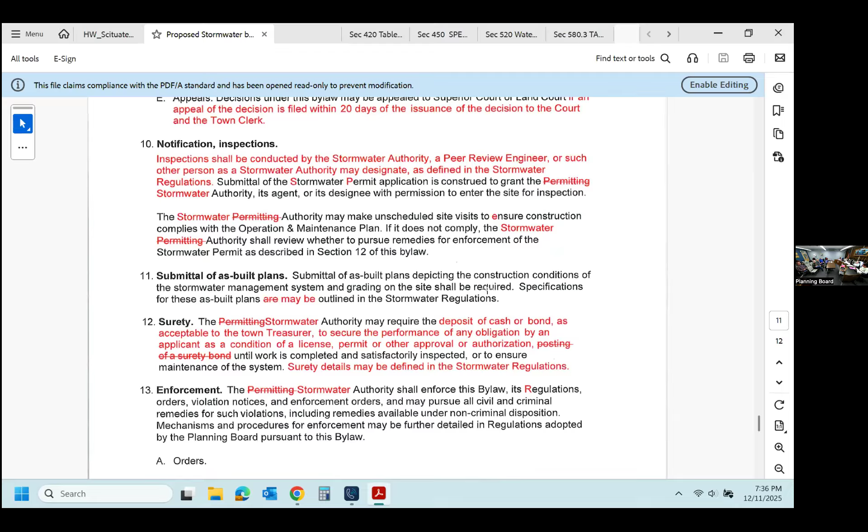Stormwater authority is either the planning, the town planner, or the conservation commission, or the planning board, or conservation commission. It depends on where the project is located. If you need a notice of intent, the conservation tries to do the stormwater permit, all upland stuff is planning. That's what people get confused.

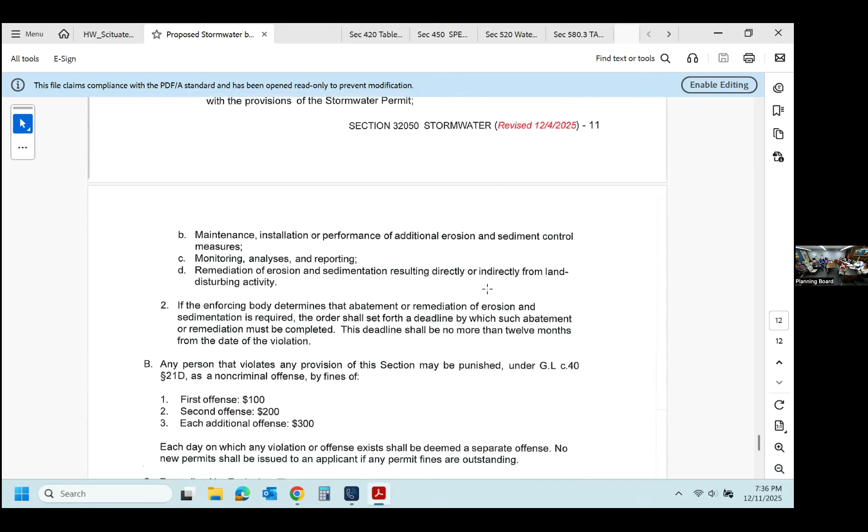So that's the general framework of what we did. Any questions or comments? Anybody online, Kate?

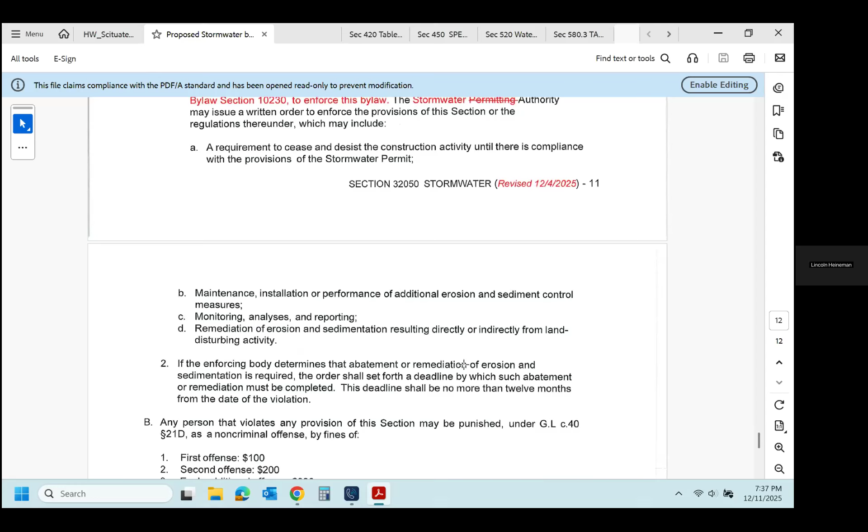Hello, my hand was raised from the definition section. So the permitting authority, it's now the stormwater authority, correct? Yes. Can you go back to that section? I went over it quickly, but it looked like in some instances it was the planning board, in some instances it was someone else. Yes, in upland cases, it's the planning board. If you need a notice of intent or a conservation permit, it's the conservation commission. That's because we don't want everybody to have to do multiple permits.

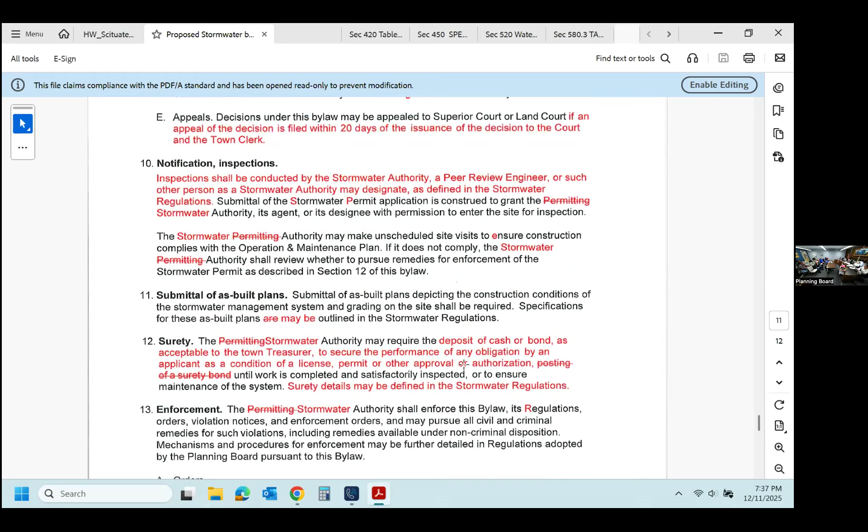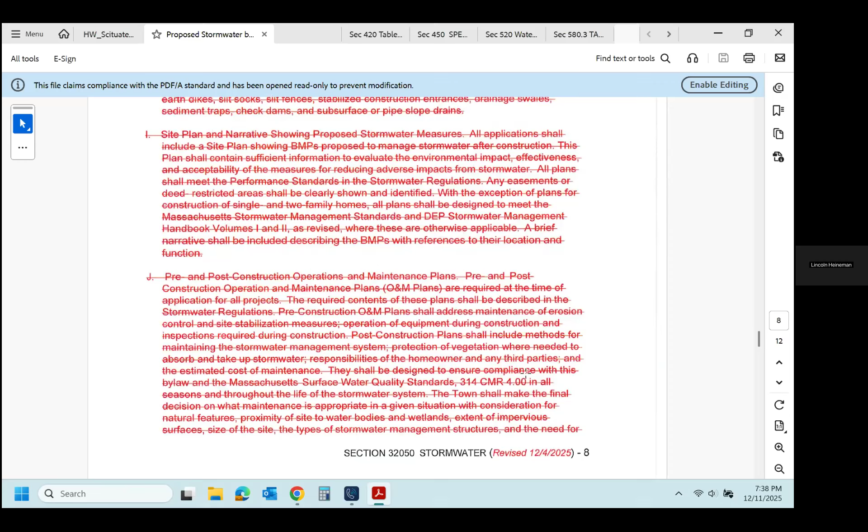So can you go to the definition, please? What definition would you like? I think it was on page 2 or 3. Okay, whatever the stormwater authority definition is now, and how it's different. That's on page 3, at the bottom.

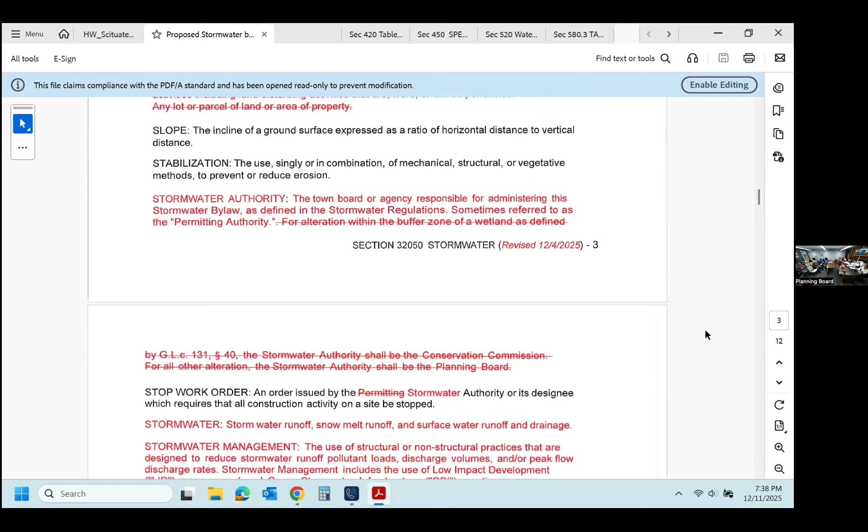So the breakout of responsibility between conservation commission and planning board is within the regulations, and the regulations haven't changed. What the bylaw says is within the purview of the Conservation Commission, and what is in the purview of the planning board hasn't changed. It's just gone to the regulations. Correct. Thank you.

How are you? We all set? Unless anybody has any more comments?

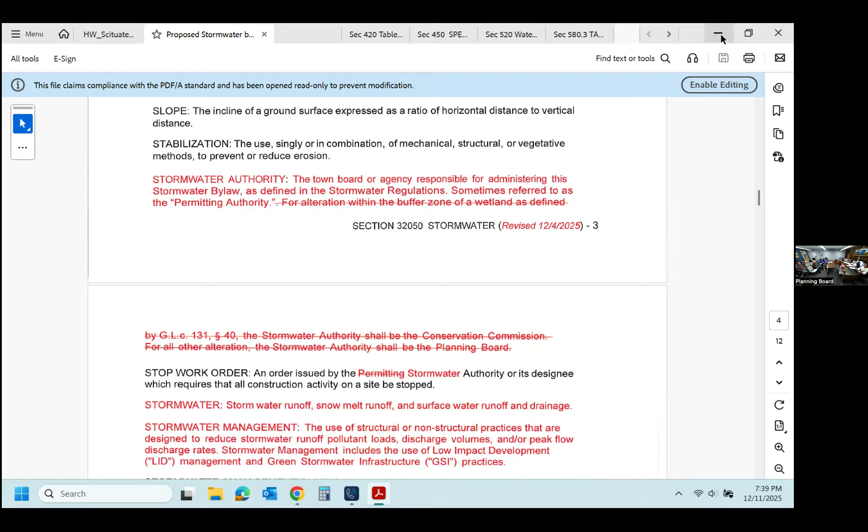We'll be taking comments. If anybody wants to send me comments, we'll take comments. The legal ad will go to the newspaper next week, for publication, for a public hearing on January 8th, same night as the zoning. We're gonna do all the public hearings together. So can I ask you, if you do have comments, it's much easier if they're written, so keep track of them, as opposed to taking notes over the telephone.

When did you say you needed them by? Well, you give them the deadline? No, I didn't give a deadline. Well, I'm suggesting you do, just because you want to have them all in before the public hearing. Technically, we will post December 31st for the public hearing on January 8th, so any changes we would need before that time. I mean, because then whatever changes we make, we'll post new stuff online on the planning board webpage so that everybody's working with the latest version for the public hearing. Santa is not bringing us new stormwater, that's up to us.

So really, by the 28th or 29th would be ideal if anybody has comments on either the zoning or stormwater. We all set? Thank you very much.